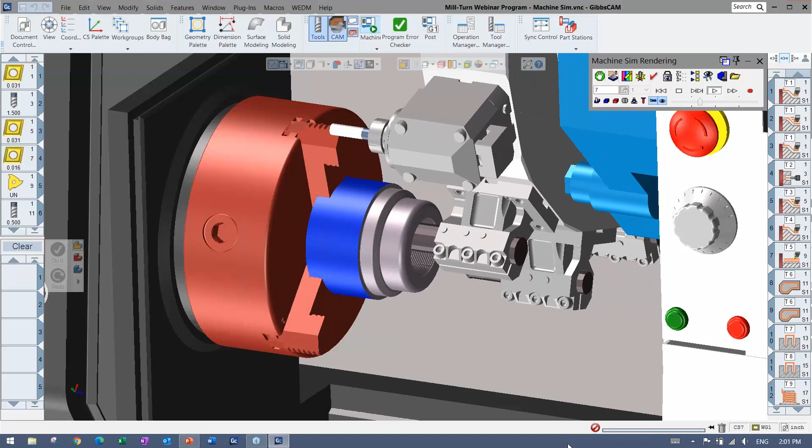I'm going to get right over to Gibbs here, and I have the part that I'm going to be demonstrating here, and you can see kind of the full setup where I have a whole machine sim, the machine's in there, fixturing, there's tool blocks, all of the tools are well defined. The purpose of this webinar is just to show off how very smooth and simple it is to go between milling and turning when you're using a machine like this that has obviously turning, but also live tooling in most situations. And in some situations, it can get even crazier than that with milling heads and lathes and stuff.

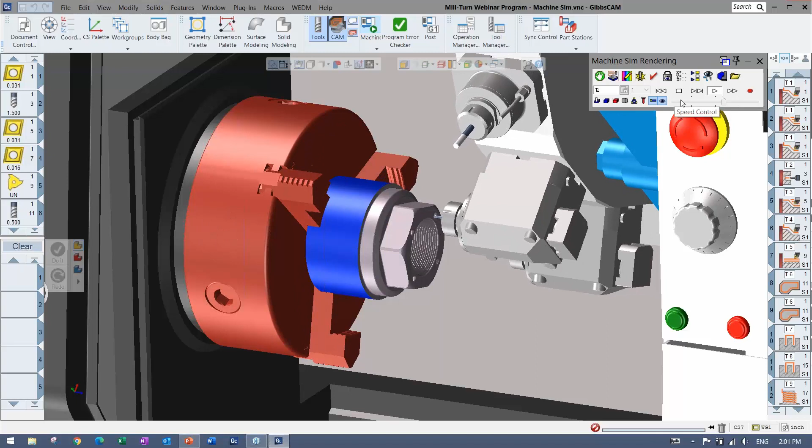So we're going to focus in on a single turret and a single spindle. And I'm going to walk through and just highlight all of the little things. I'm not going to go too much into training mode here. I just want to get the point across of how it can be used, and we can go from there. Right, so the simulation itself, I'm not going to have that in the file right away, but you can get an idea here where it's really ops on the face, the OD, anything that you would expect to see.

All right, so I'm going to open up a file. I do have files that I'm going to be loading just to keep things smooth and running on time here. The file really doesn't have anything done to it other than I've selected the machine quickly, I've put in the stock and clearances. I've even brought in a fixture here just to show you that you can do that. Bring in a model, download it, whichever, very easy to use. And you can hide it, doesn't have to be shown at all.

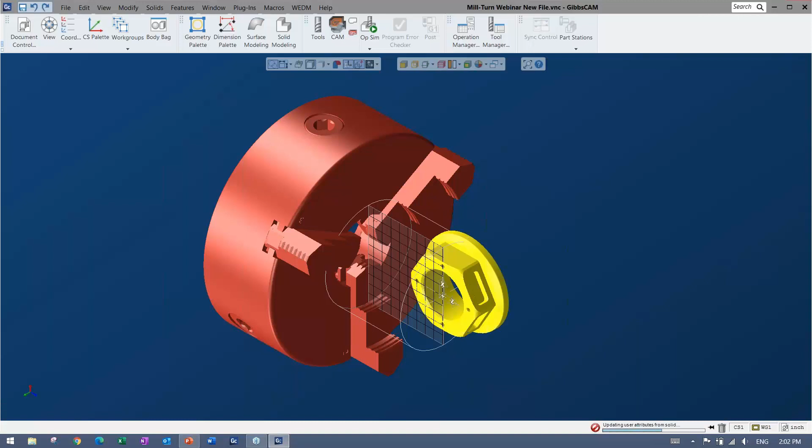All right. And I'm going to bring in a part as well. The part, when you're cutting something, can be a model like I'm going to bring in. So I'm just going to import my part in here, and you'll see a solid representation of it. But you can import wireframe geometry, you can draw wireframe geometry, you can dimension, modeling, all that can be done in GibbsCAM. So wherever you end up starting, you'll have something to cut in the end and to apply the actual tool paths to. Right, so you can see here everything's nicely defined.

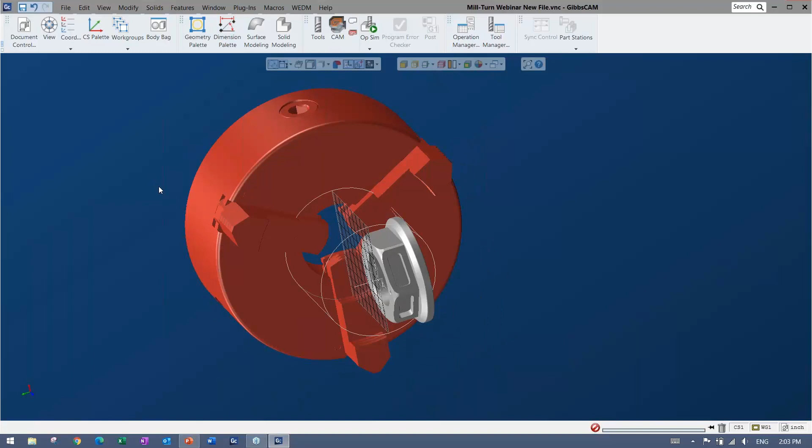Now once you have your part in here, there's lots of very good display preferences. You can hide things, show things, colors. Really the whole interface is very customizable. Anything can be moved. So I'm using the default layout, but just know that as I go through, you can change it and add shortcuts and all of that good stuff. Moving things around is also very simple. There's a view palette that you can use. I prefer to use shortcuts and my mouse or a space mouse. They're all available. They can all be customized so that it's the same as other softwares too, which I find is very important when you're switching between them.

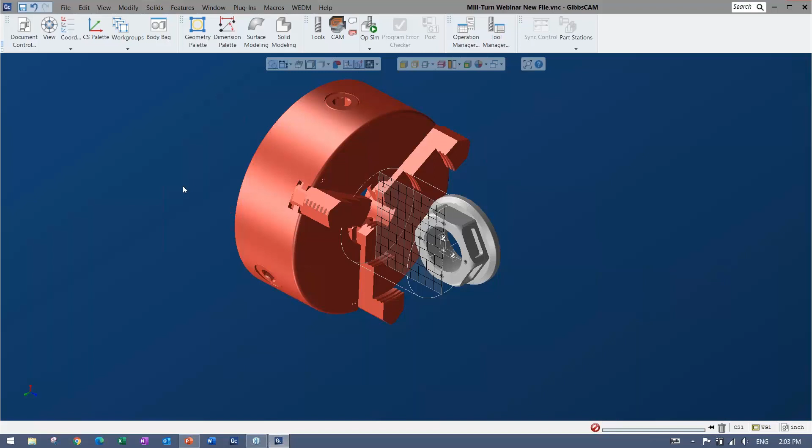Okay. So first thing I'm going to do is I have this chuck here, and I'm just going to send it to this thing called the body bag. So that's a little manager for the solids, and there's different levels as well that I'll get to when I'm engraving something. All right, so all the good stuff is there, and it's very easy to access here, even on the default layout.

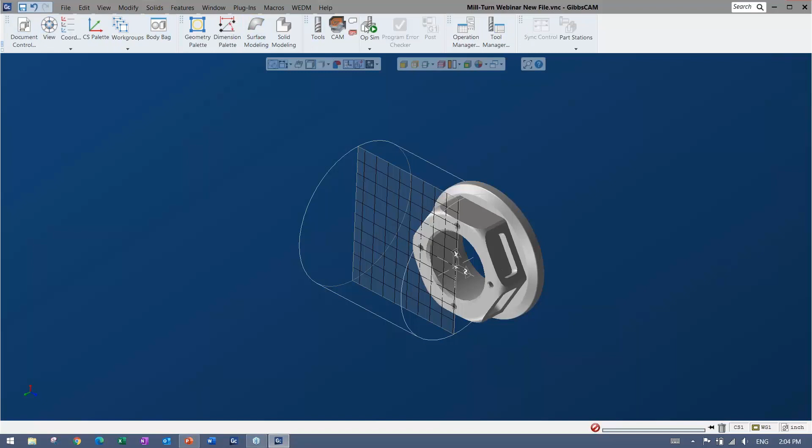Now, you can see my part didn't quite come in the proper way here, and there are plenty of tools to move things around, to locate your part, rotating, translating, all the good stuff, and some little shortcuts too. So this does come up for me, depending on how the CAD modeler has modeled things. It could possibly come in the wrong way, and I'm just going to go in and bring up the CS list. So these are coordinate systems, and you'll see them come up again. But basically just a machining plane, and I can go ahead and align this part to that plane. And it just takes some of the angle out of it.

Even if it was a severe angle, you could do a multiple lineup and line up to one plane and then the other, and then be ready to go and machine your part. So I'm happy with this. It looks like it's in the right orientation. There are plenty of tools to check it, but I know I'm good, so I'm going to go ahead with that.

Now, I want to cut, so I have something to cut. Now I need something to cut with. So that's when it comes into the tools. I find the workflow with Gibbs is very, very easy to understand. It doesn't really change whether you're doing turning or milling.

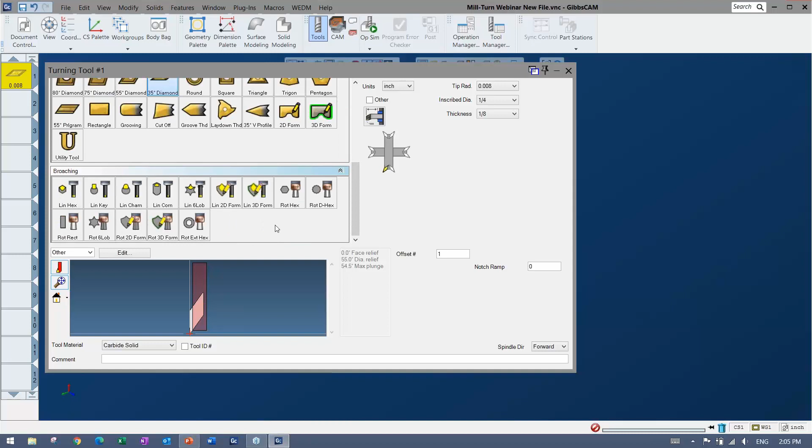You can see here that when I make a tool, first thing you do is you pick a tool form. You can see in these cases we have some milling tools here, so that would be live tooling in our situation. We have our turning tools, and we even have some broaching, some linear and some rotary broaching in there. And all of these do have a form tool equivalent, as well as the tool holders.

So you can draw, you can import a wireframe or a model and apply that as your tool shape as well. All right, once you pick something, you fill in the size, fill in the holder information, and then you give your offsets, can give a little comment, and every tool is like that. So if you're making a tool from scratch, it's very simple. It's easy to find your way around.

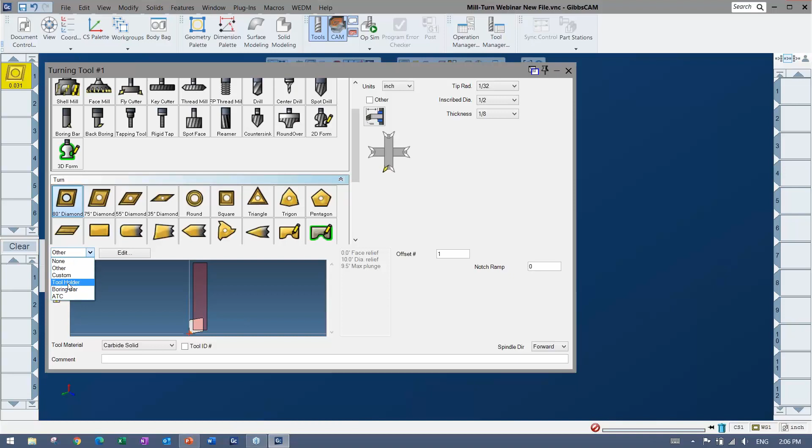Now, as you get into programming, the better thing would probably be to have some way to bring in tools. So I'm going to be doing that coming up. So you can definitely load tools and all that good stuff as well. All right. Let me just pick maybe a standard insert here. Tool holder on it there. And you can see the preview is all nice and 3D as well. Boring bar.

So once you have a tool, whether it's a milling tool or a lathe tool, you bring it down to what's called the process list. And this is really where everything gets added together and set up before you actually make it into a toolpath. Now, depending on your license, you may or may not have everything that you see on my screen.

But this is how it works, where you either drop your tool down in here and you get access to the process types, or you can go it the other way around and double click here, select a process type, and it will filter through all the tools it thinks you can use, and you pick it, and then it all gets there in the end to a dialog that would set up whatever your toolpath process type is. All right, so whether I'm doing a contour here or roughing, threading, there's elliptical contours. I mean, there's a process for pretty much everything.

So we're going to stick to certain ones here, but if you don't see the ones that you wanted to see, then obviously you can put in a question or ask your local reseller. Now those as well are loadable. So the best way to do it, I mean, you have to make your tool most likely at some point, but I actually have my tools and my processes created, again, to keep things smooth and keep things under the time limit. So you can load tools here, and there's tools that you can save yourself.

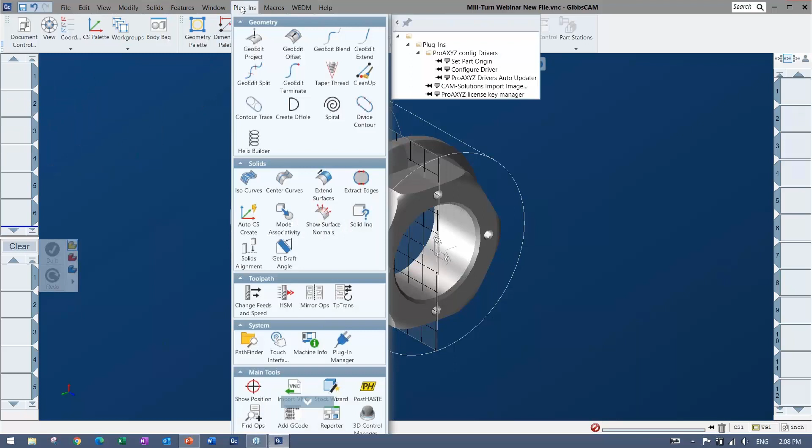You can also use different plugins, like Sandvik has CoroPlus. There's also the Helical Solutions and the Harvey Tool libraries here, and some other solutions for that as well out there. So in that case, maybe I have a process already set. You can see here I've created a folder, and it's just Mill-Turn webinar, but I'm going to go ahead and load out of that. But you can make your own folder system by machine, by material, by tool type, whatever you'd like.

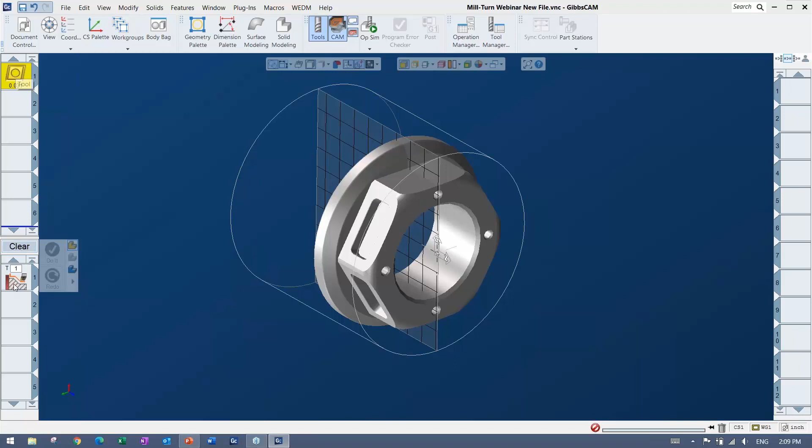And when you load it in there, then you can see if I load a tool, I get the tool. And if I load a process, I get the tool along with all of my parameters filled out already. So that could be anything from feeds and speeds to what type of process or what type of cut you want to do, right? So the one that I've imported here is the contour process. All right, so we're going to put that onto our model.

And again, the workflow is always the same. You'll see as I go through, make tool, drop tool down, pick what tool does. You get a dialog. Everything's all in that dialog. There's no hunting around trying to find different things. And once things are filled out, then you can apply the actual toolpath to the part.

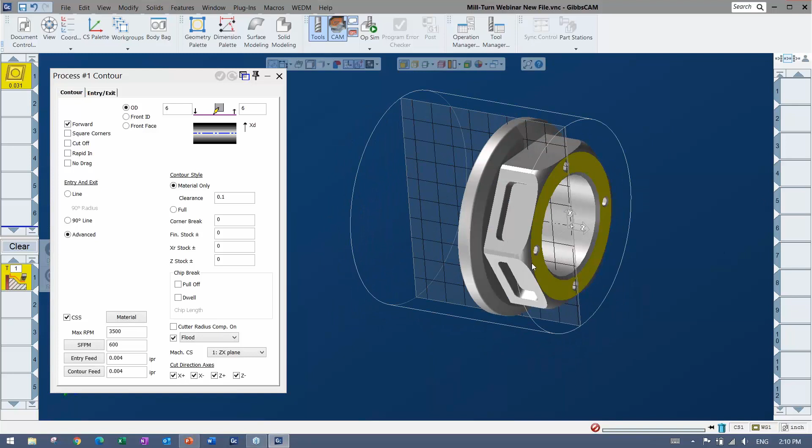So that's the place I am at right now, and depending on what process you use, there's different things to select. So I could be maybe selecting the model, or I could be selecting some wireframe geometry. I may extract some geometry from the model. If it's already drawn, I can use that. In this case, I'm going to bring up something that's used to turn on solids.

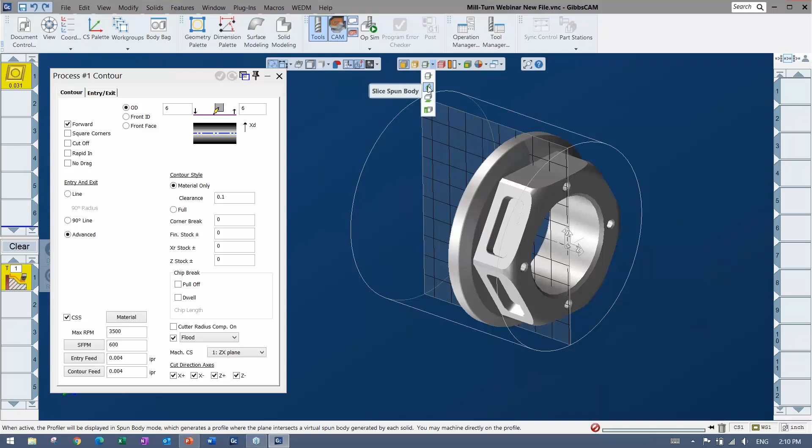That's very useful, actually. It's called the profiler, or the slice plane. And it has a certain mode. So if you see the slice plane just as it is, you can see that it slices through. And it's not really what I want to use to turn this part, because if I turn this guy, then obviously it's going to gouge in the higher areas. So what I'm going to use is I'm going to turn it to slice spun body mode.

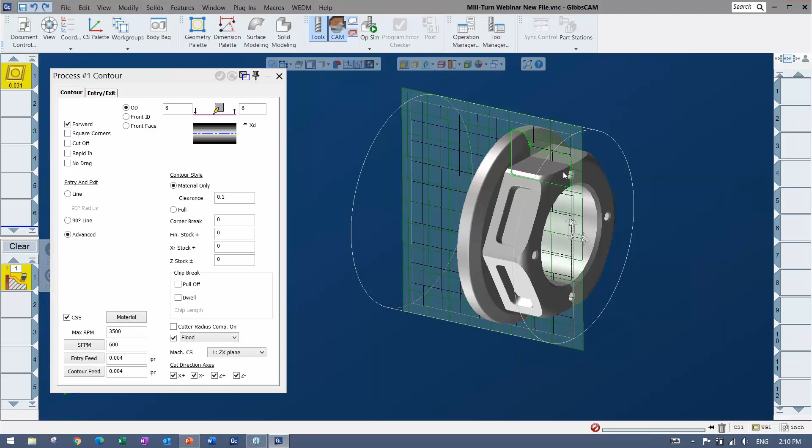And that one's really great because you can never bring that slice plane off zero, off the center, so you know your diameters are right. You can also see that it's showing all of the highest points. So it's showing all of those and getting rid of anything that you can't hit while the part's spinning, like these holes are not being sliced anymore. And you can extract geometry off of that, or you can just go right in and use the profiler. All right, so that's going to be what I'm going to pick for this specific toolpath.

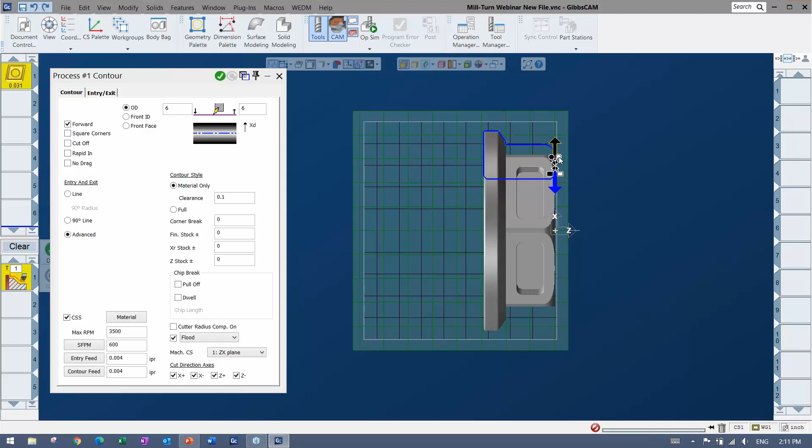So a contour or roughing, anything with a specific shape is usually going to need some kind of a profile like this or a model. Now when I'm applying, in this case, our lathe processes use these start and end markers that are quite easy to use, really. That's just about where you want to start and where you want to end and what direction you want to go. And then whether you want to go all the way around or one skim on the face, let's say, like this.

I'm ready to do the toolpath right now, but I will mention that you can move these by specific amounts and all that. You might see that come up. I'm just going to kind of place things where they are and rely on this material only to prevent any air cutting. All right, even though I drag this up here, when I do the toolpath, you'll see it avoids that.

Now, once I'm ready to make the operation, finished operation, notice my list over here, which is the operation list, is empty. So I'm going to go in, I'm either going to say do it, or anywhere I right click, there's a do it. All right, and if I click that, you can see the toolpath appears, and I have my finished operation over on the side.

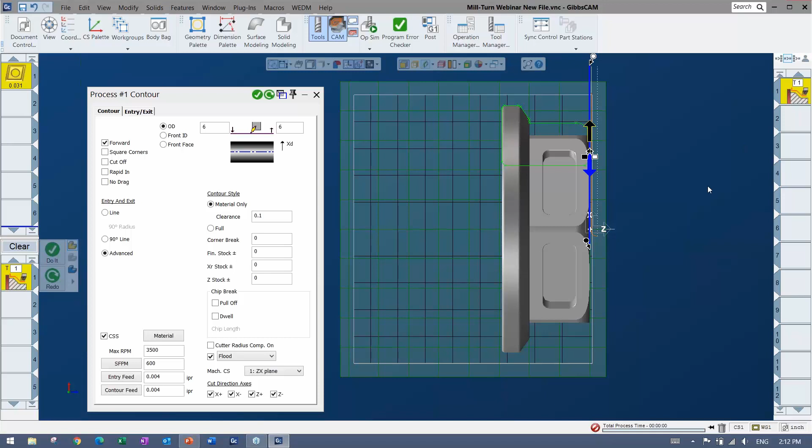Now, if I wanted to change something about this, then that's when redo comes up. Right, so there's redo, which will recalculate the toolpath based on whatever changes you made. So if I didn't want to go down as far, let's say, you can see that it shortens that guy up. But once again, it knows that there's material being removed, so even if I drag it past that center mark, it doesn't go past. I can always override that as well.

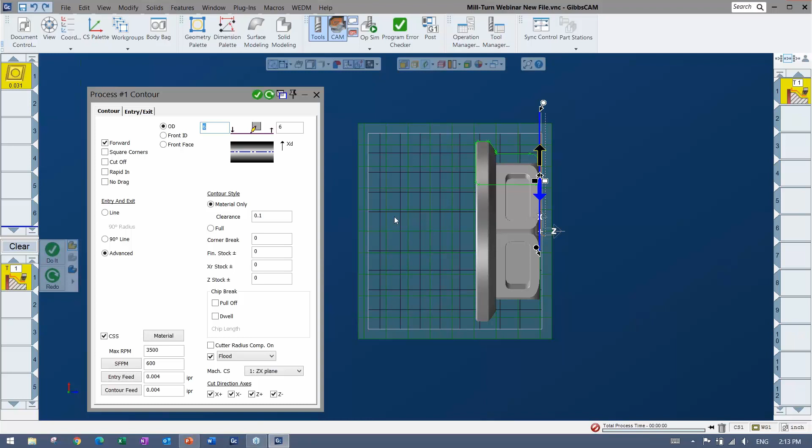So that's the gist of adding the toolpaths, and I'm not going to go into much about what each thing does, because I get into training mode sometimes. But I'm just going to clear this off, and I'm going to go ahead and check out the simulation now. Right, so we have an operation. I want to watch that.

So what I can do is come up, start my sim, and there's a couple different simulation modes. There's the one that you saw with the whole machine and everything, and then there's the one that back plots. You can rewind and play, and this one is also a nice one called OpSim, and we'll just show whatever you want to play with tons of useful options. I'll bring them up as I look through the rest of the toolpaths, stopping anywhere you want, different colors, checking to see if the simulation matches the part, etc.

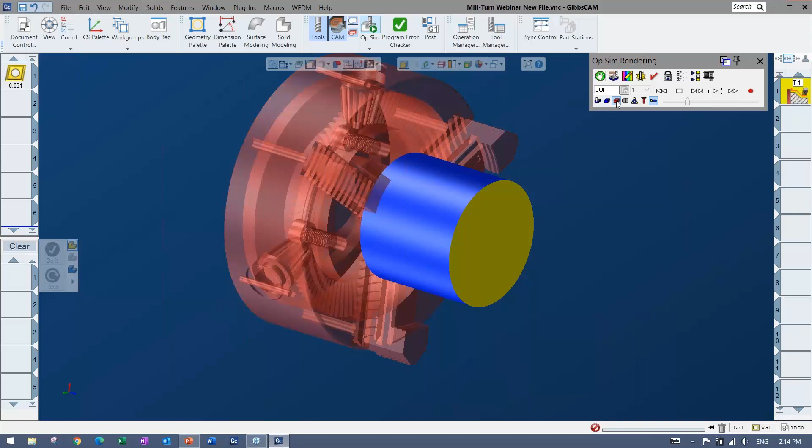All right, and you can see, even though my picture was hidden there, it's showing in the sim, and I can always turn that off as well, or make it transparent or anything like that. You can see I have every little part in there of that picture.

So I'll pop in, and you get to the point where by just looking at the toolpath that's probably going to be fine. And if you see a little line going right through the part, then that's probably when it's bad. But I'm going to try not to do that.

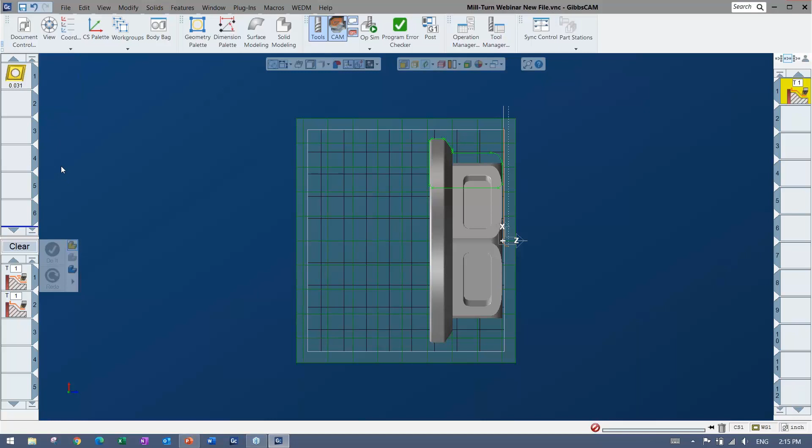All right, so I'm going to load a couple more in here, and again, not going to dwell too much in it, but here's some roughing and finishing, let's say. So you can see these are stacked together, and they'll apply to the same selection that you make. And this one, obviously you can do roughing and finishing tools, absolutely, but here you can see that that one's using the same tool and it recognized that, so it's not going to make me another tool or a duplicate tool. And this one's going to go ahead and rough this in.

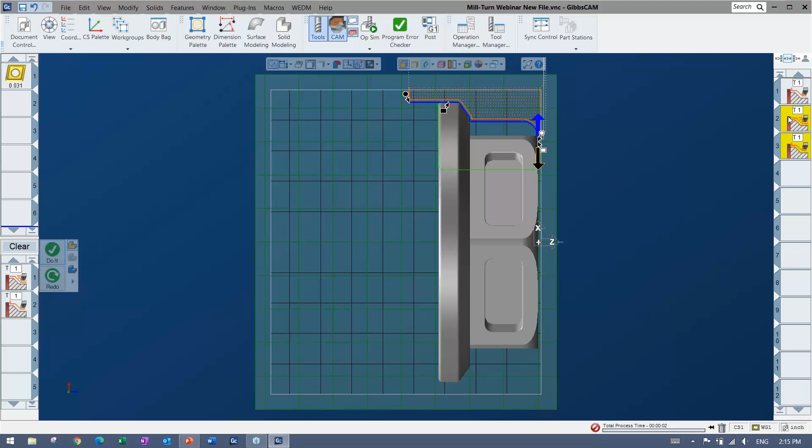All right, so I'm going to start picking things out here, and depending on what you want to rough, again, there's little shortcuts. You just do something like that, and that selects everything that I want to cut. And I can say do it, and you can see it generate the cut there. And I have 2 more operations. And again, I can pop open the simulation if I want. I can play it, and I can kind of check, is that okay? Anything crashing at all? And I actually put on this one, it's hard to see, but there's a chip breaker. I thought about using the pull-off, but again, there's lots of options in there once you start digging that you can use. But nice and easy.

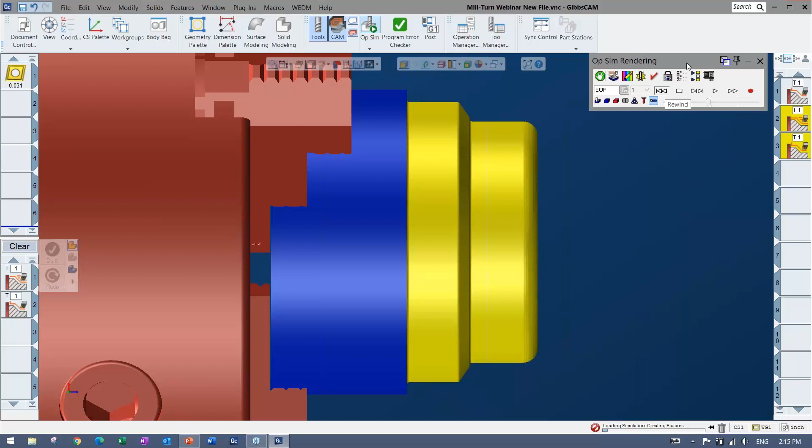I got my thing. My OD is turned. My face is turned. Again, this is a demonstration, so don't give me too much stuff about the actual methods. I might cut things differently in other situations, but let's move on to doing a little bit in the middle here. So here's an example of one process that doesn't even need anything to be selected, right?

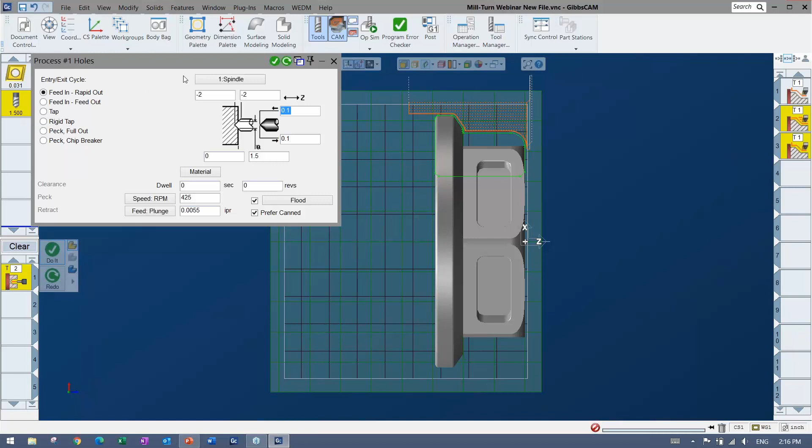So it's actually the U-drill in this case, but you can see here when I have a tool that can do both, I have a live tooling drilling, and then I have an on-center with chuck spinning drilling, right? So one's going to give me the on-center, and that one obviously can't go anywhere but on-center, so that's why I can just go ahead and say do it, and I don't actually need to select anything.

I'm going to go ahead again, maybe I'll do some rough and finish and threading. And again, these guys, if you're making them by hand, then great, but definitely save them if you can. If you use that same material, especially those same tools all the time, you can even have your whole tool list in here and possibly your whole machine sim set up before you even have any kind of thing going on, where you might have a template file you don't even have a part in and you never change your tool locations. That's all doable, all doable.

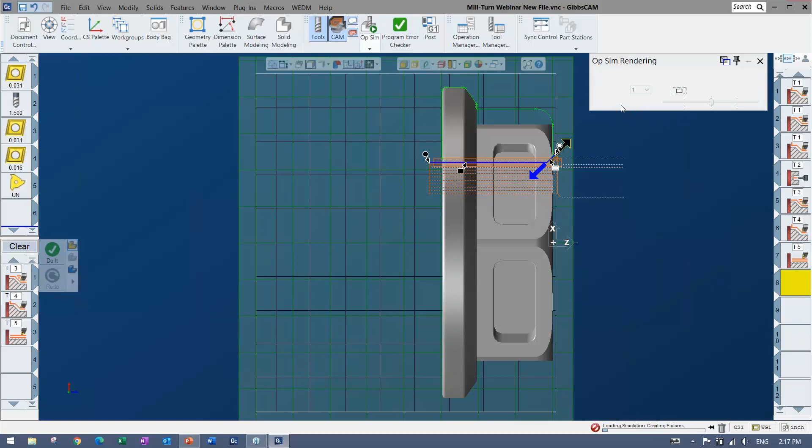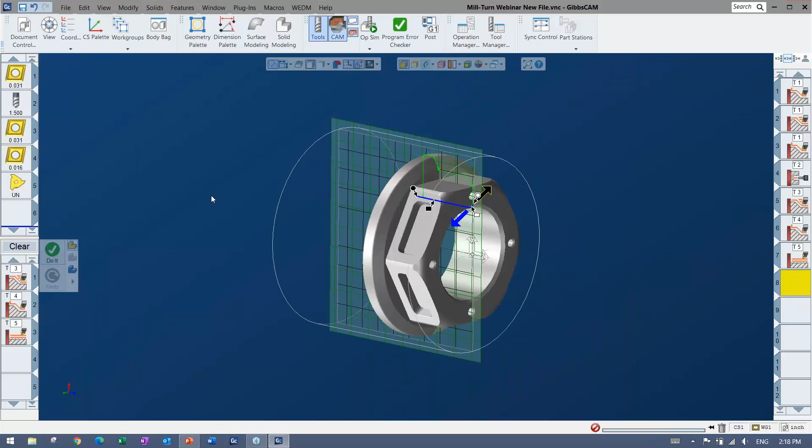And here again, you can see the material only, picking up that there's material back here. And again, if I didn't want to go back all the way, I could always redo, just kind of shore it up, and it's very quick to just redo with a redo shortcut. Again, checking all the way if you want, or doing the whole program and then checking is perfectly fine. But for any inner diameter work, you can see there's a little cutaway, so I can actually see what's going on inside. You can see that, yes, that's cutting, and then obviously looks like the thread's going on in there. And the transparency could also be used as well. I'll play it all a little slower when we get to the end there.

But next up, let's do some actual live tooling. So you saw that the turning was very easy to put on. It's just one plane, easy to set up. But I don't have to jump into another side of the program or anything. If I want to start milling, I can just go between milling and turning all I want. I can reorder the operations if I don't like the order that they're in. Anything like that is doable. It's very easy, and then reposting the code is very easy as well.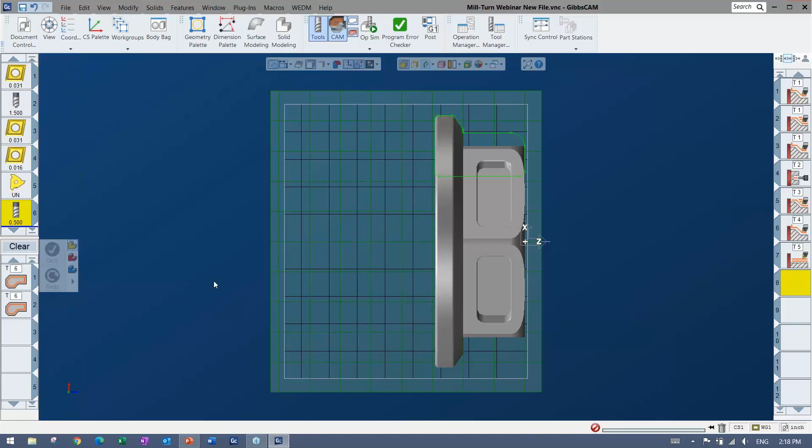So I'm going to go ahead and rough this hex out. So in this case, I'm coming in on the face. And you'll see the tool is very easy. Once again, this is now a milling tool. But again, you're just picking the form. You're putting in the dimensions. Again, offset's a big deal, obviously, and tool holder can be in there. I don't have tool holders because the machine sim tool blocks are taking care of that. But this is the main thing I wanted to bring up, where you just have a little indicator where you want to point towards.

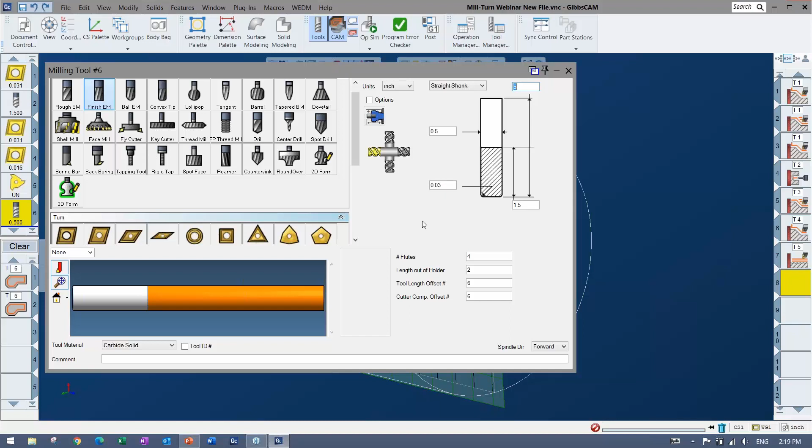And these ones kind of allude to some of the more advanced machines where you might have something like a sub spindle or a lower turret. Right, so I have this guy pointing towards the face. And in my actual process setup, this particular machine, I can always make more CSs, but this one has CSs created already, and you can see that this is going to be done on the XY plane instead of the ZX plane.

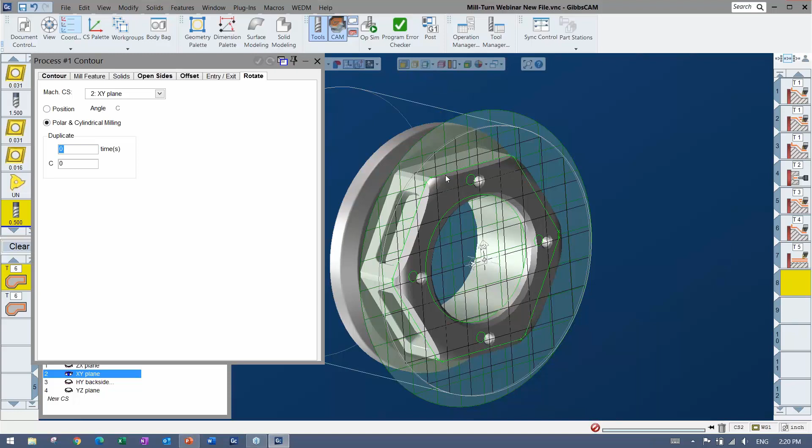All right, so I'm going to go ahead and say, hey, get on the XY instead, please. And you can see that I've also switched the mode to slice plane, so I can easily get this geometry. Maybe I'll just go in and, you know, start here and end there kind of thing. Again, you can put them in precise amounts and all that kind of good stuff as well. And when I do that, you can see it's deployed processes.

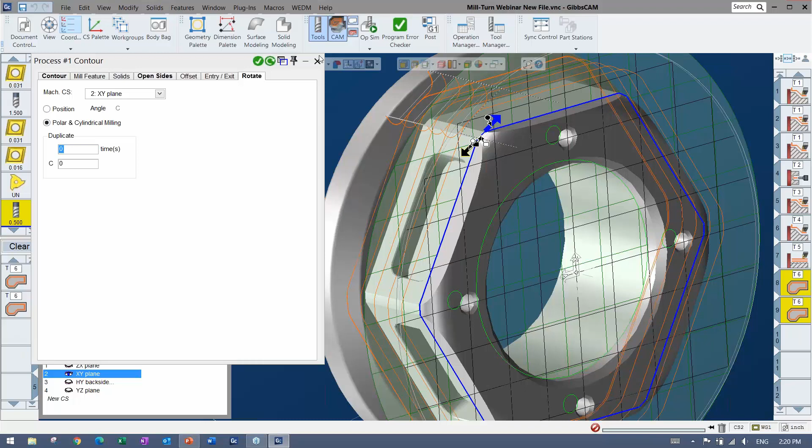And again, everything I'm throwing in are paired up, but they don't have to be. If you want to separate your roughing and finishing one by one, that's fine too. Or you can throw them all in there if they match, if they go together. Things like spot drill tap, and you never have to look up the pilot hole size anymore. And it loads in with all of the right feeds and speeds and everything. Right, so nice and easy.

And that guy's going to hang out there, and once again, I can come in and simulate. And this is where we have a specific option that we could go between. All right, so why don't I go ahead and skip to this operation? I could do a couple things. I could either select to just go all the way to this operation or buffer to this operation, or I could just simply play just the selected operations here. All right, and I'm going to watch it.

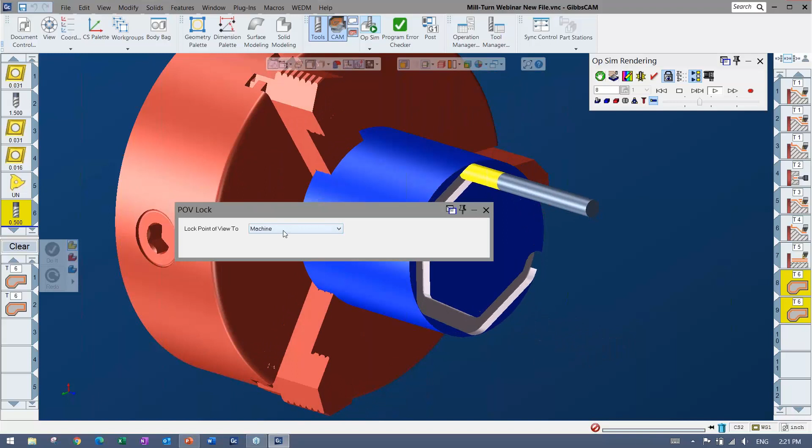And this is having to do with rotary milling. So this allows you to watch it as is if you want. Or I could go ahead and set it so that the machine is actually doing the motions it would do. Right, and you have this, which would be the C-axis interpolating, and you're doing more rotary milling or polar and cylindrical. Or if I wanted to change that at all, I can just come in here, and literally it's just one selection here where I can set it to the position instead so that it does X, Y, Z, if possible.

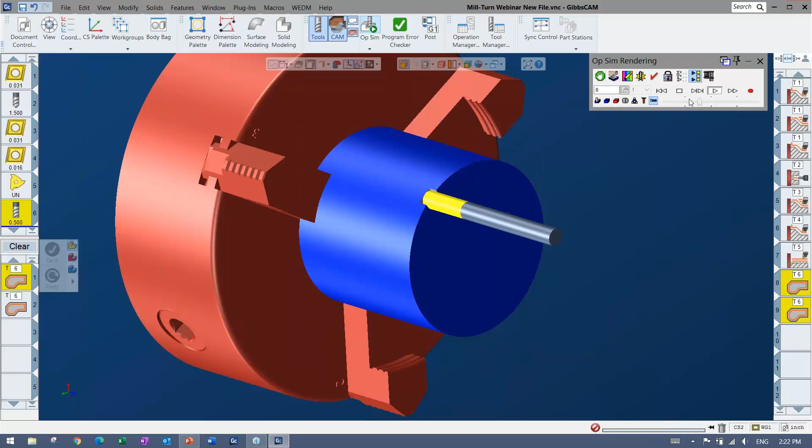You can see no C-axis movement. Didn't have to repick anything, didn't have to do anything special other than that one option that I changed. All right, now it's using the X, Y, and Z, and you might use one one day and the other another. I mean, it depends, and if you don't have a Y-axis, absolutely a must. So that hex looks good. I have the rough and finish process there, so that should be good and ready to go.

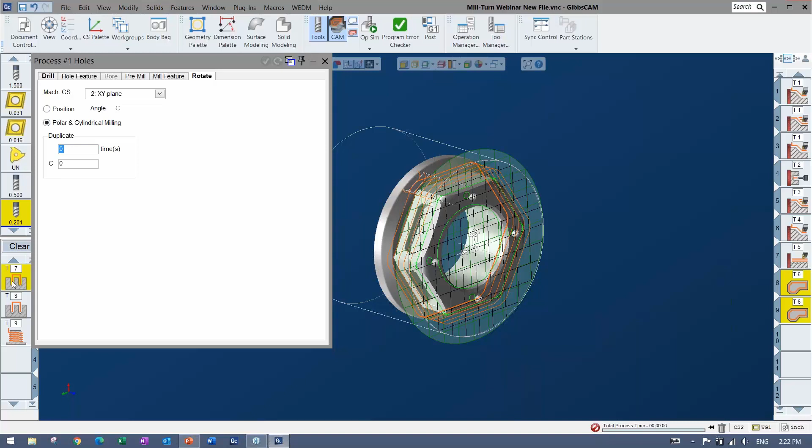We've got a couple more holes on the face here. I'm going to come in here, do a little thread milling. And once again, just making sure we're on the XY plane. I have a drill, I have a chamfer, and I have a thread mill. I already have the profiler selecting what I need, so I'm going to go ahead and just grab those, do it. And there you can see those three that went together and were already set up maybe from last time. I've just made my life a lot easier.

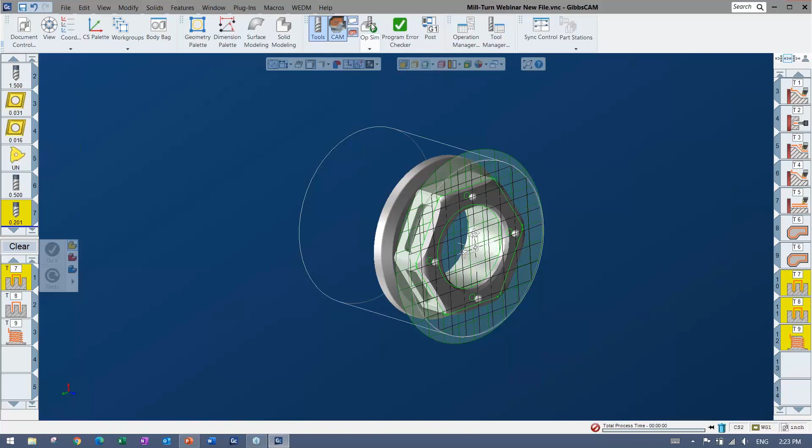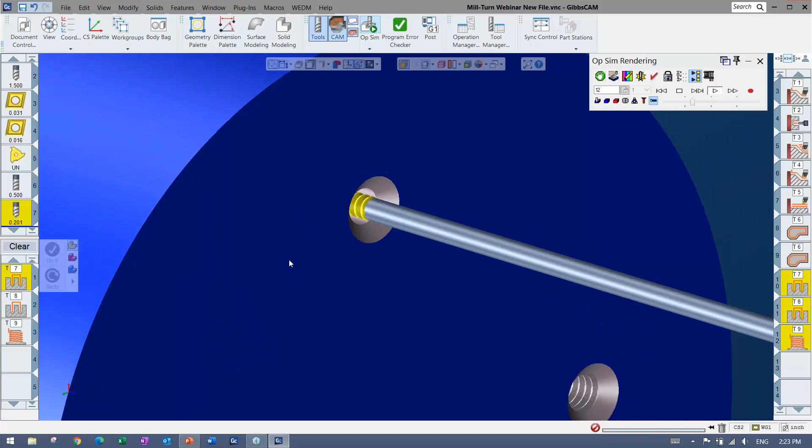Again, same kind of thing too, where I'm coming in here and I can simulate and I can watch and see if I'd like to change anything about it. But this again would be a good one to do the polar and cylindrical, keeping that turret up in the positive here and coming in, spotting, and then you can see here the full profile thread milling, which is another thing totally supported, very easy to use. Again, just making a thread mill tool, dropping it down, choosing thread milling, filling in all of the parameters. That's using the C-axis or the positional once again.

So this part's coming along. That's about all the face work I'll do on there, but obviously we could be also coming in on the OD, so I'm going to go ahead and load something for that. And the first one is the pocketing on the outside. Once again, if we take a look at the tool, nothing really different about the tool other than it's a smaller tool, of course, but we have it sticking towards the OD now.

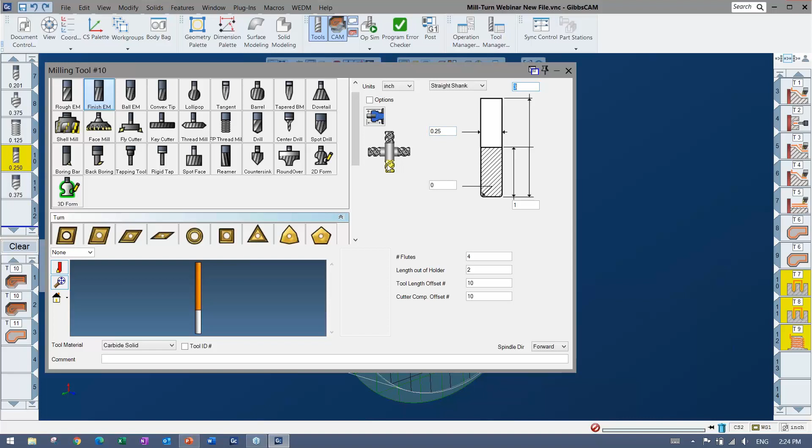And the worst thing that can happen is it makes the tool path and then you simulate and you see that the tool is the wrong orientation and you change it. Or a warning comes up and says the orientation couldn't be achieved. So that's not a problem at all.

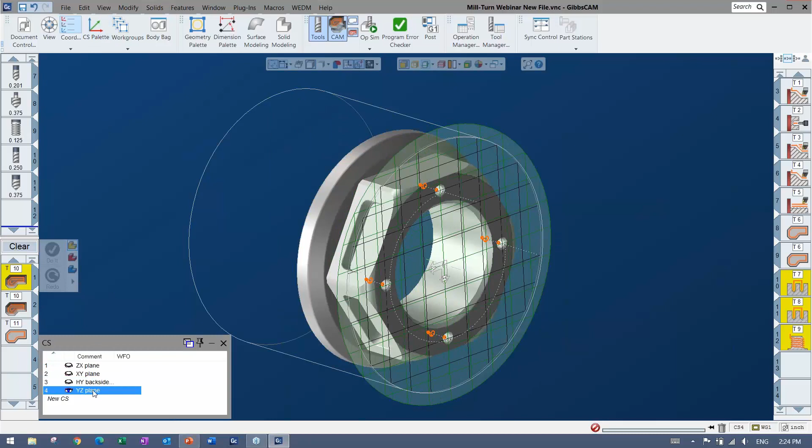Now, if I look at my planes here, I don't actually have a plane that would angle to that pocket. Right? If I take a look at any of these guys, I'm either going to have to use an angle option that I'll show you in a second, or I can go ahead and make a new CS plane. And it's very easy. Again, this CS list, I'm just going to hit new CS. And maybe I'll go ahead and call it pocket here.

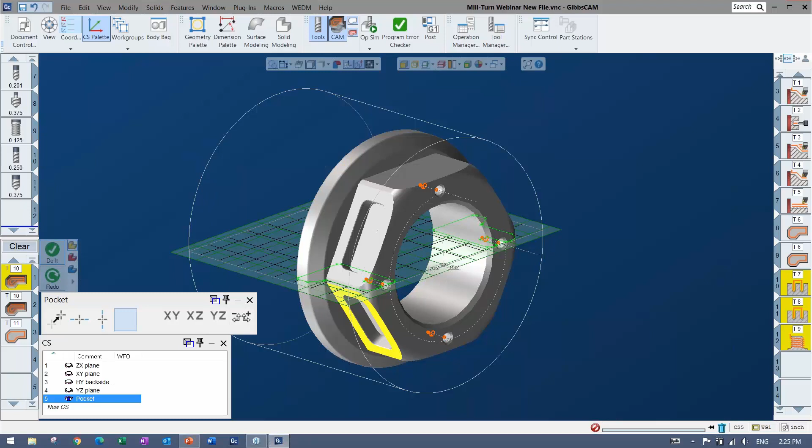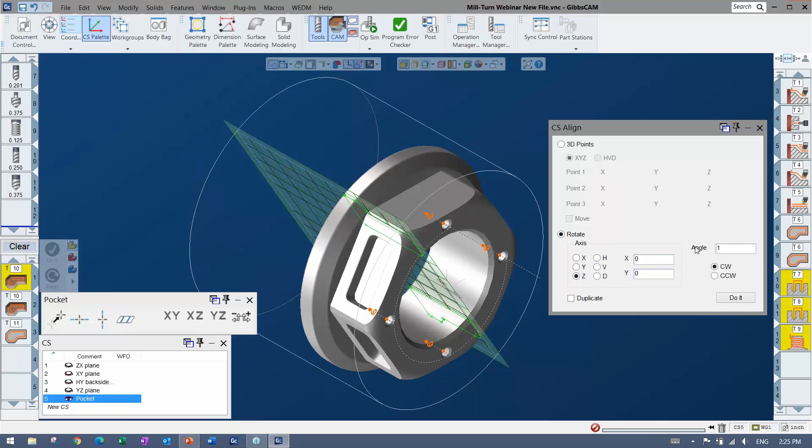And I'm going to open the CS palette, which actually creates the CS, or moves the CS, I should say. And I'm just going to go ahead and align it there. You can see, depending on what you have, there's a negative and there's a positive, right? So I can always also flip. I could go to the other side, whichever is going to work for me in that situation. I could also do a rotate, maybe a 180 rotate around. You can see all I'm doing is I'm putting that so that it's on the positive side.

I'm going to do it off the ZX plane. Let's do that one there. Pocket. My profiler adjusts to it. So I can again reposition that to take another slice of whatever I want to cut. And then inside of my process, I can say, hey, there's my pocket CS, or whatever you want to call it, the angle that it's coming in or what it's doing.

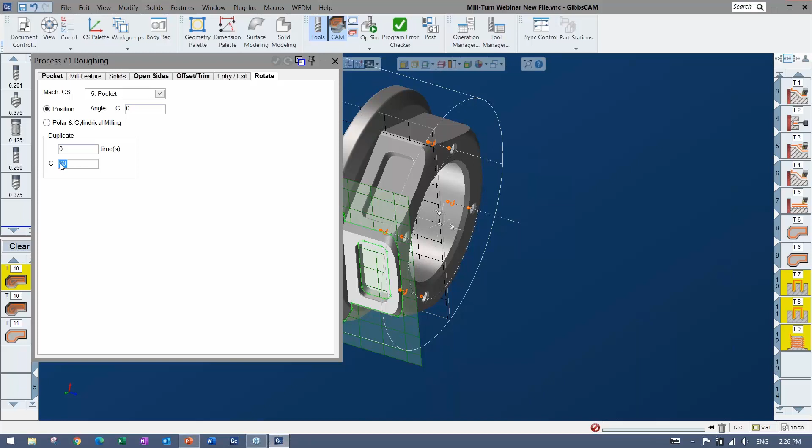Select that. And also notice that I have a duplicate here. Right, so maybe I'll just do it without the duplicate first. Oh, and I still have a duplicate in the other one, but you'll be able to see here. I'll turn them off just to get the point across. But it's basically however many times that pocket happens around this part, I can always say, hey, duplicate this same feature around however many times I want by whatever angle. And it makes it really quick to create instead of doing another CS, even though that's pretty quick too.

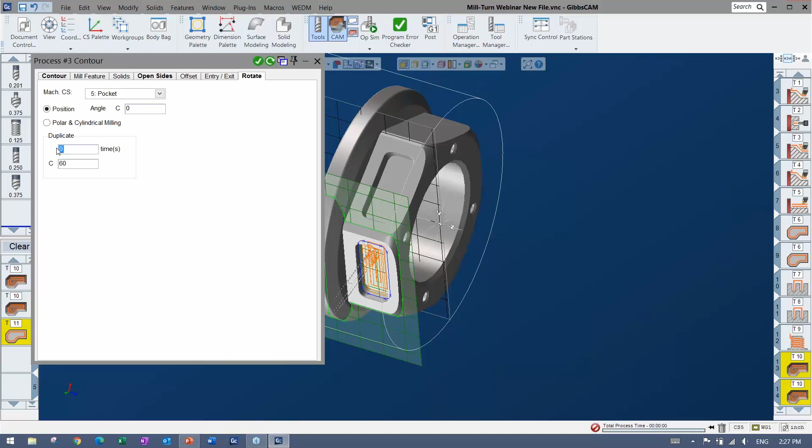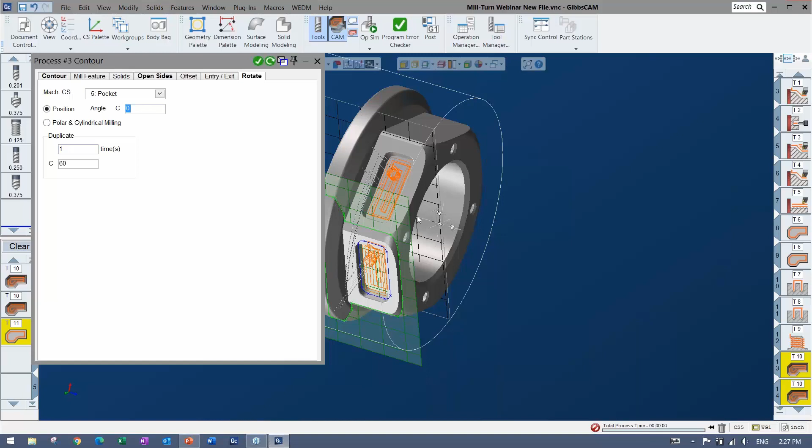So if I said 1 times 60 in these cases, you can see that's been duplicated and it will cut both. Now the order depends, but you can always reorder on the op side, or I can also put specific C angles to start from. So in this case, I actually have those same pockets on this side, and those are 180 away, so it's possible I could do a 180 here and do a do it instead of a redo to create 2 more processes here. And I forgot the 180 in the other ones.

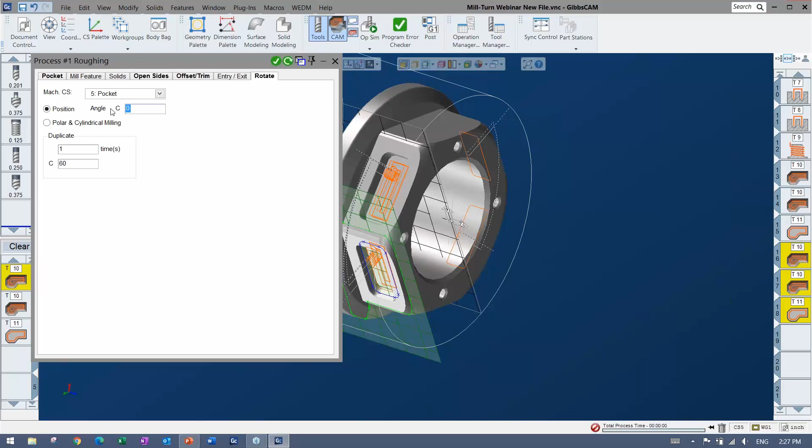So no matter what you were doing here, however many angles, if it's a weird angle, if it's not equalized all the way around, there's a chance that you can get to it using this, or obviously the coordinate systems are always there and very easy to place, especially if you have a model.

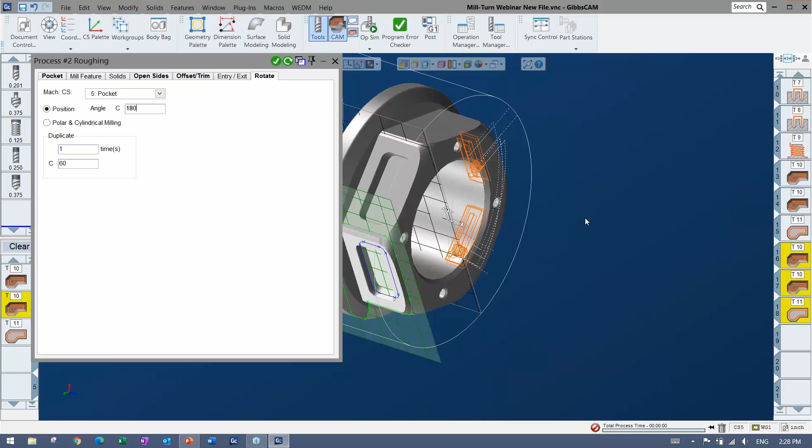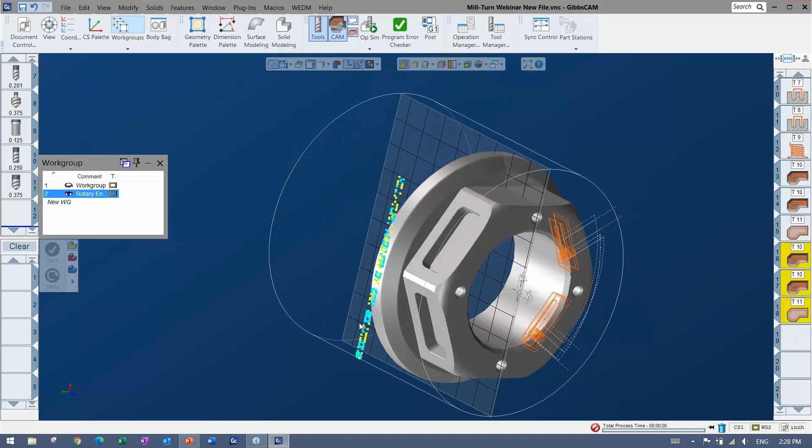Now, one of the last things I'm going to show you here is the rotary milling once again, and I actually have some text in a work group here. Here's some text going along there. I'm just going to switch over to that coordinate system and basically wrap this text around because I want that to be written around with rotary milling. And very easy. Once again, it's just like you're doing a straight contour, but you're going to be doing a polar and cylindrical.

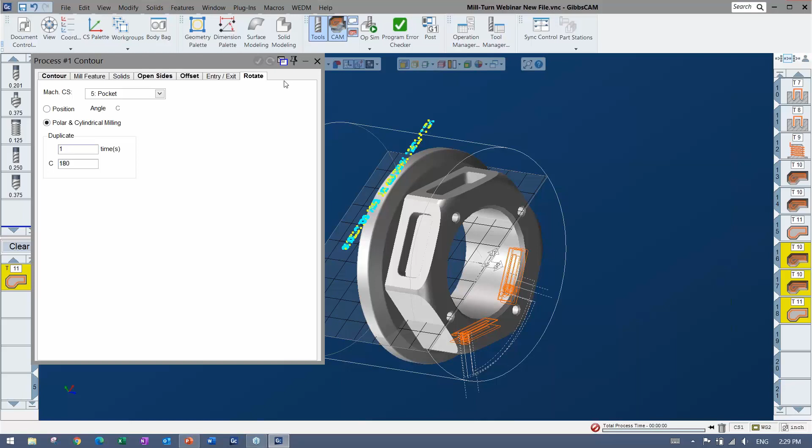If I load up this rotary engraving, it's a normal, just regular contour, but I have polar and cylindrical. And maybe I'll do that one again, 180 from there. And selecting, there's lots of different methods of selection. I'm going to just turn off the solid, let's say, and select like that. And say do it. That's going to write them all down and wrap them there around like so.

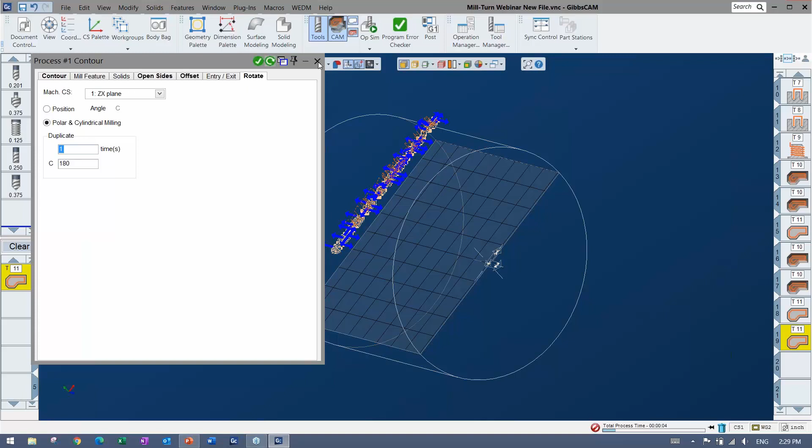So I'm going to go ahead and play out to that. Maybe I'll use this one for that. Again, I'm going to stop before operation 19, let's say, and I can turn that on, and that means that it's just going to play as fast as I want. And then it will stop at that operation. There's also a way to buffer it in so that every time you rewind, it goes to that operation.

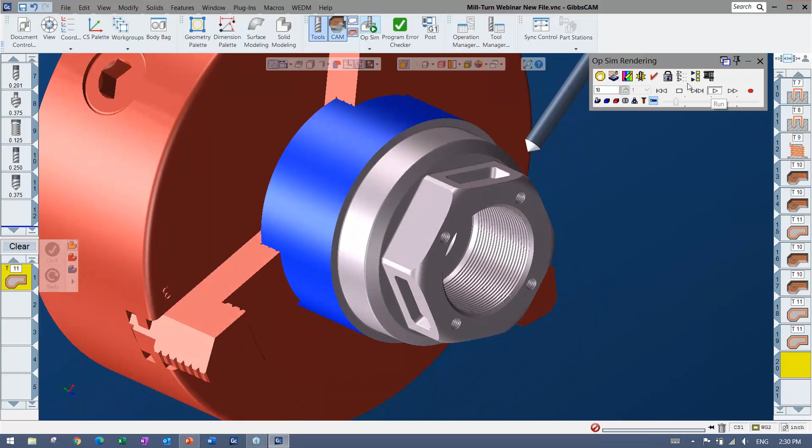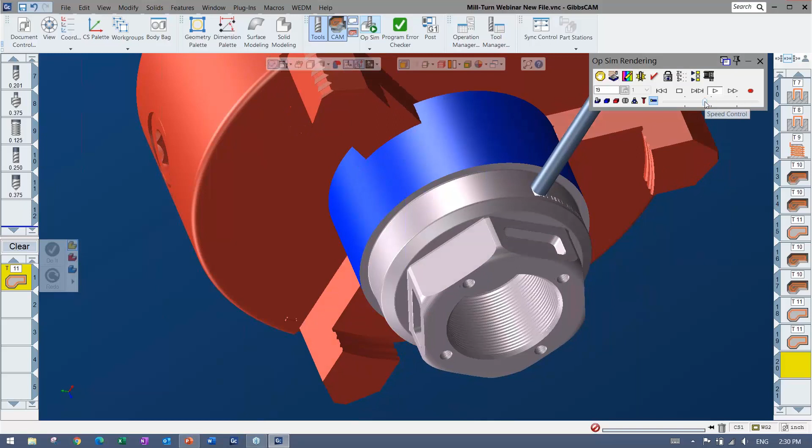Here you can see it coming around and doing some rotary engraving. And there was nothing special about the text. There's a very quick text creation tool in the geometry palette. You just put it at the right radius. It doesn't even have to be wrapped. That's what polar and cylindrical does. Now there it's going to go ahead and engrave around there. And then because I duplicated one at 180, it's going to go ahead and cut on the other side as well.

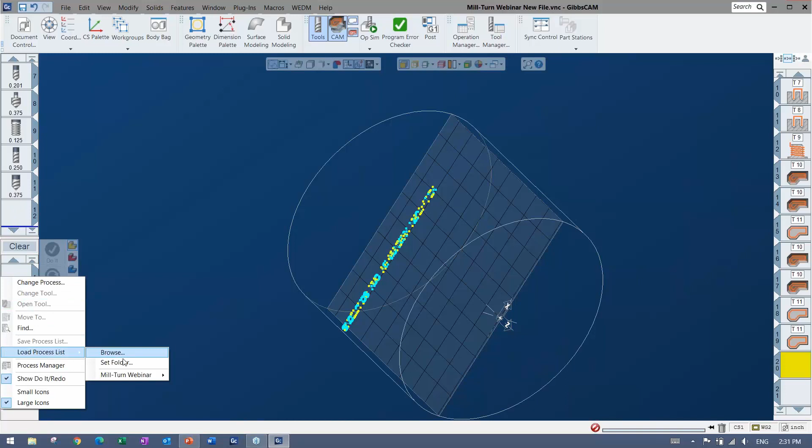Now this part's pretty much done, so all I need is the part off now. So going back to the turning, again, I can just make a turning tool or load a turning tool, and there's no kind of change in where I am or what I'm doing. This one I saved with a tool holder, so that's why that came up there. But again, if I don't want it up there, I just throw it in the body bag and it's safe for when I need it.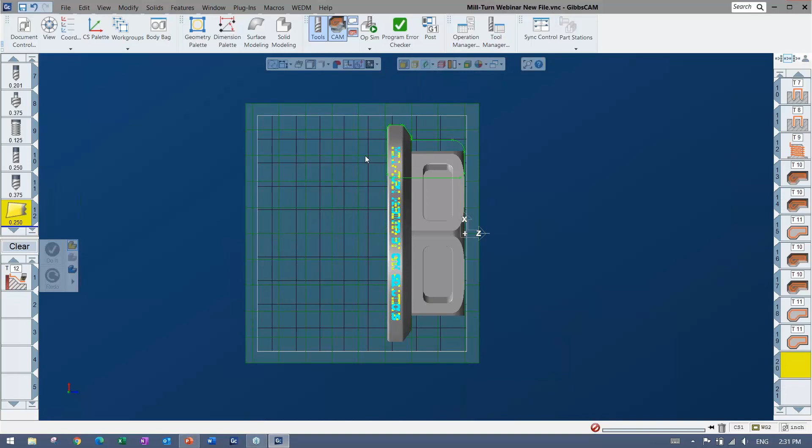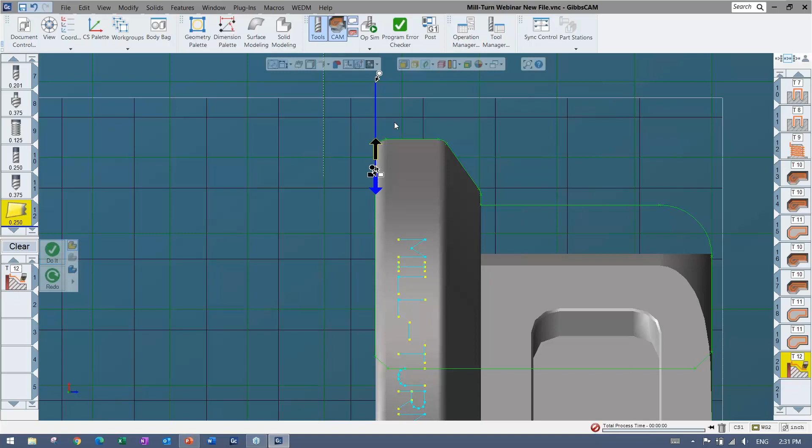Probably going to go ahead and grab my slice spun body again. I'm on the correct plane. I have a little feature here. I mean, you could leave material maybe and finish up after, but maybe I'll come in, go this direction, down a little bit, maybe make a little bit of room for myself. And I could go ahead and maybe come in here. And different things like lead-ins, lead-outs, all that kind of stuff is totally doable. I could arc on or anything that you want there.

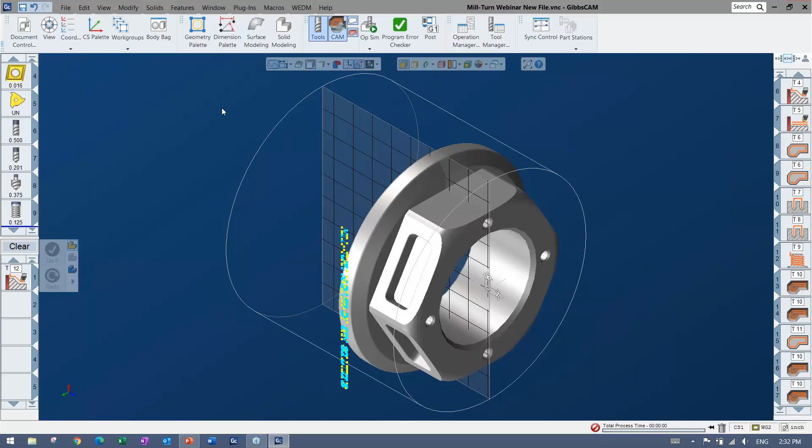There you can see I have some part off thrown up there. And that's essentially my program. So why don't I go ahead and watch this one, and then I'll bring up the machine sim again real quick. Notice I didn't rewind or anything like that, so now it's going to just go ahead and move along. Oh, my bad, yeah. I did go a little bit too far past it, it looks like. I can throw a stop there. Let's do 20.

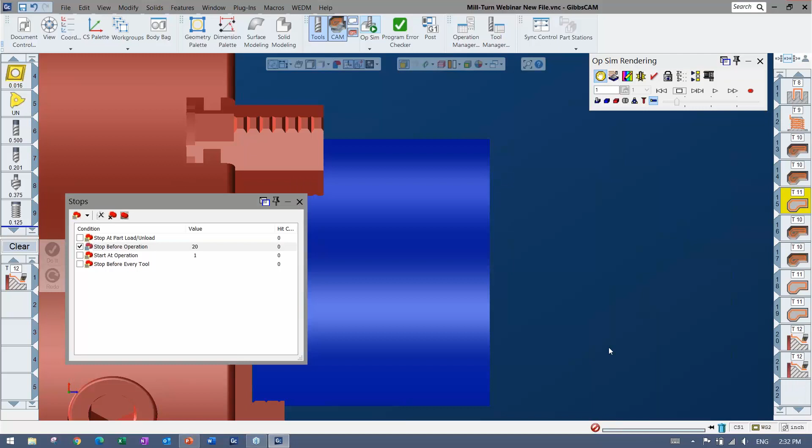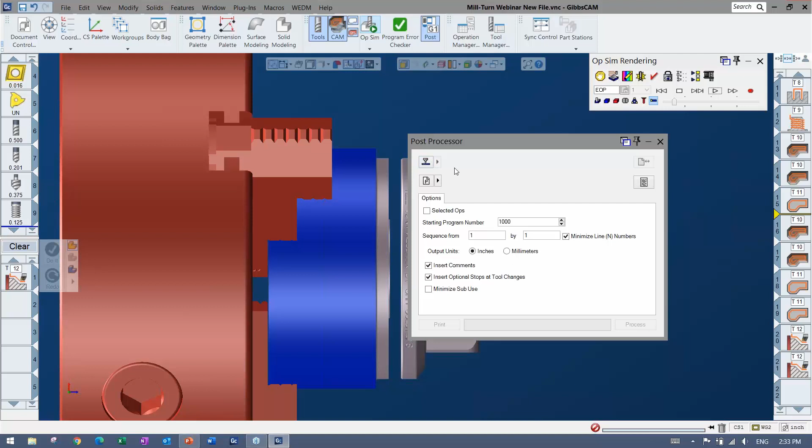Looks good. Once I'm ready, I have program error checker that I can do. There's collision checking. I can set it to tell me if something hits something else or anything like that. And then when I'm happy with the program, I can go ahead, load up a post processor and post that code. And the post processor is customized for your machine. So there's lots of things that you can do there and different machines it can support.

So why don't I bring that up again? I'll save this guy. And I'll bring up the machine sim once again and just play that for a second. You're seeing a mill turn here. And this machine actually has a sub, so that's why you can see this. I'm just not using it.

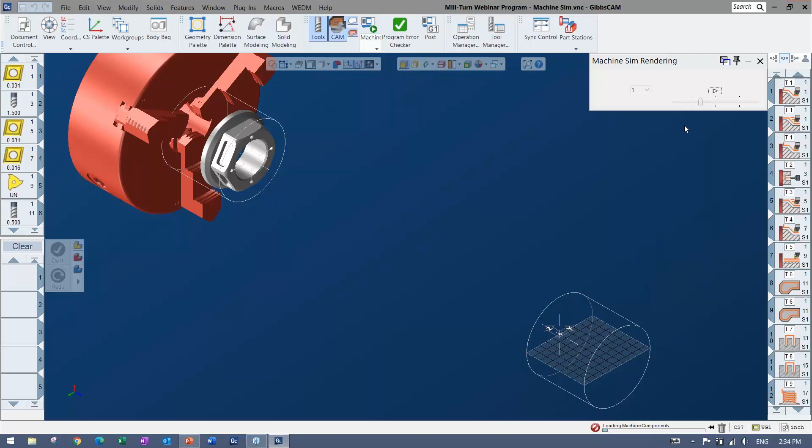But I'll bring up another machine sim there that shows you really can go up in advanced kinematics. GibbsCAM can support so many different configurations and different kinds of machines. It's all just about configuring the MDD, which is the machine side, and the post, and just getting things set so that it makes the right code every time. Matches the simulation perfectly.

You can see all the tool blocks. This is the whole machine in here with a control and everything like that. And you've got tool blocks on the turret here with the tools in it. It's very easy to add the tool blocks as well, especially once they're in there, it's just in the tool. You click, you say add tool block, and you pick the one you want. And the hangouts can come from that. And I can do the cutaway or anything like that; here I'll move it along a little bit.

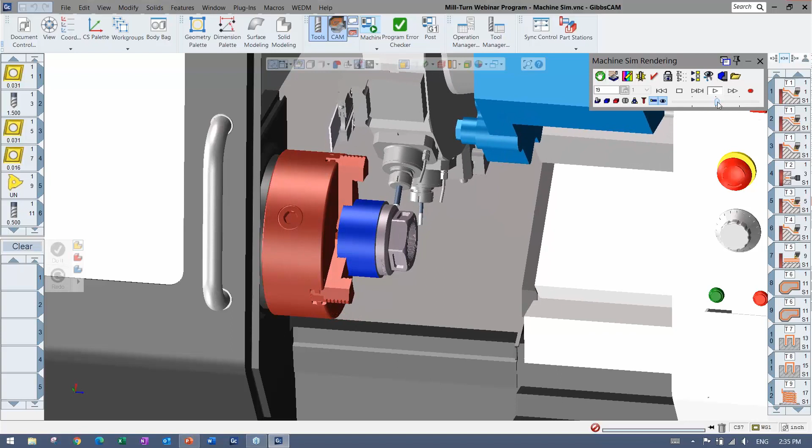You can see the C-axis doing its thing, thread milling, and then doing the pockets. Things are pretty close. I want to make sure that those things aren't hitting. So this is a good way to do it without having to sacrifice anything or having a heart attack at the machine. There's the engraving, and then the part off. Once again, this one has a sub spindle. I'll bring up another one here that also has that. Just a couple different options you could look at.

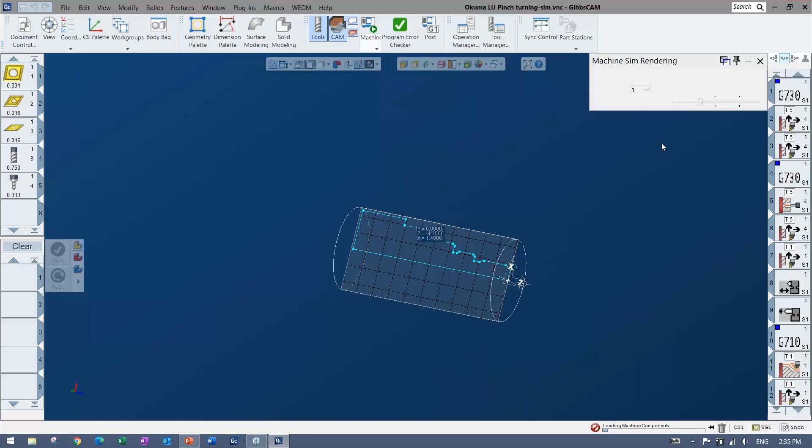And this would be more considered MTM. So I'm sure there will be or has been some kind of a webinar or video on that online. But here you can see a machine with a programmable tailstock here, and it's got an upper and lower turret. It's doing pinch turning. It has wait codes. Things are overlapping operations to save time.

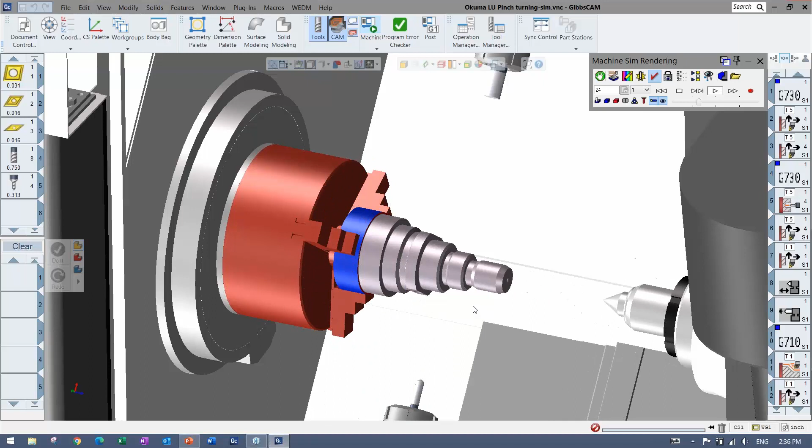So that's all pretty much equally as easy, I would say. Everyone has to learn something, obviously, but it's all supported, postable, full machine sim once again. It's a beautiful thing.

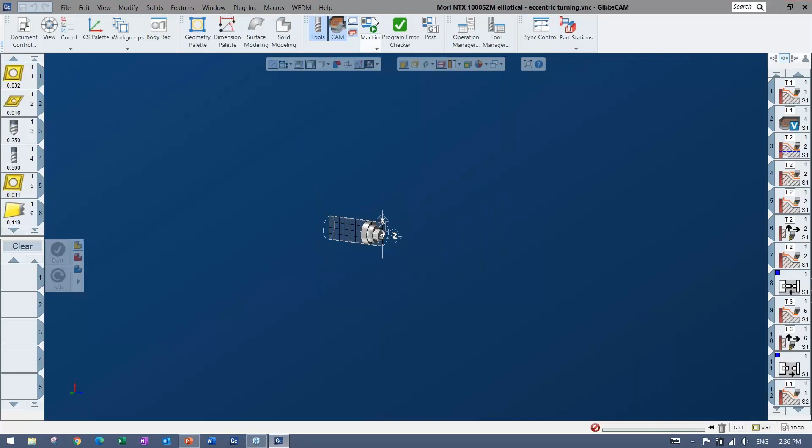All right, so that's really what I had to show you guys here. I'll end just with the B-axis. That was one that was requested here, so having a full milling head inside your lathe. So I'll bring that up and then we'll move along.

So here you can see the B-axis here that can access the two spindles. There's a sub spindle here. There's a turret there as well that can be used. Everything can be synced up. You'll see some elliptical turning here, where it's using the y-axis, it's turning a shape, not just something that's concentric.

And it's going to turn that. It's going to turn some more. The sub's going to come in, going to grab it, going to go over. It's going to machine on that side, and it's all fully simulatable and collision checks and everything.

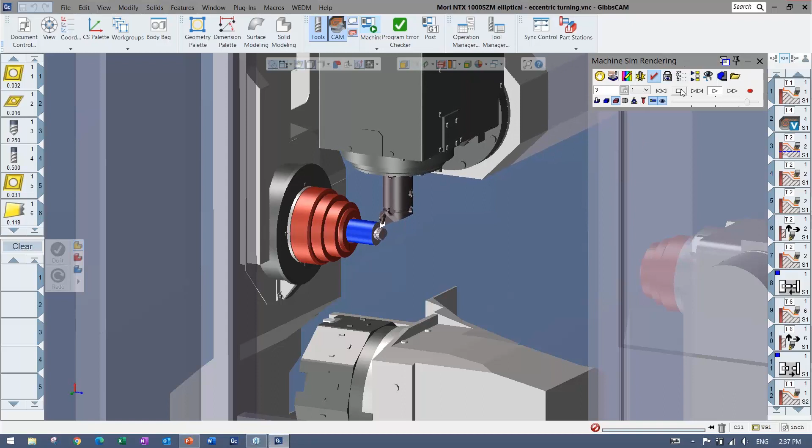All right, so hopefully that looks good. Everything made sense to you guys, and I'm going to go ahead and open it up for questions now and see where we get there.

Well, hey Dylan, this is Bart. Can you hear me okay? Yes, sir. Hey, and I called you Dylan. Sorry, Brandon. Hey, that's okay.

Thanks for doing a great job showing how easy it is to program a simple mill turn part in the GibbsCAM environment. And also at the end showing how GibbsCAM can grow with your machine. So if in the future you end up getting a machine that's more involved, for example, has a B-axis head or a tailstock, you just add a module or so onto GibbsCAM and you can program those machines as well.

We do have a few questions. So what I'm going to do is I'm going to read the questions that we have, and why don't you go ahead and answer them, or we'll answer them together. The first one that I'm going to ask, I thought was a real good one, because this part looks like it could be part of a family of parts. So we have a question that says, can you automate the programming? In other words, what are the different ways we could automate programming of a part or a family of parts like this in GibbsCAM?

Yeah, I'd say, I see a lot of people copy the file and then bring the new part in and take all the operations and put them on the new part. But if you're looking for real efficiency, I'd say a family of parts macro is probably the best bet, where literally the macro is like instructions to GibbsCAM. So it can run on variables.